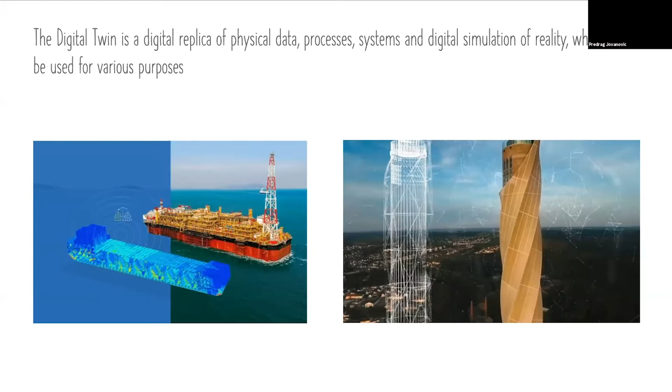You will see in the next slides how we can play with the tools that digital twins technology allows us. For the beginning, I'll try to explain simply the purpose of a digital twin. If we imagine we want to test the strength of an egg, for example, a single egg, we want to test it but we don't want to break it. This is the likely option, and the option without any damage is to test it in the digital world, because after we run the test, we can set up a new egg and test it again, while in a natural environment or in reality, we would break the egg, so it's damage that cannot be recovered.

How the whole idea started: in the 70s, NASA was testing some twins, not digital twins, but twins, where they tried to do simulations on small-scale objects. The technology of creating a digital twin model in the format we now know it, an existing or designed object with an identical copy in digital format, was created in 2002 and was first used again in astronomy by NASA, for the production of various components and systems for different suppliers. So we can say digital twins have been used primarily to calculate the life cycle at the beginning of the journey, for component systems and various assemblies and structures after installation, production, and construction. Primarily, digital twins were used to estimate the cost of maintaining different components, systems, and buildings by making various simulations of phenomena and processes that would occur on existing objects using their digital format replicas.

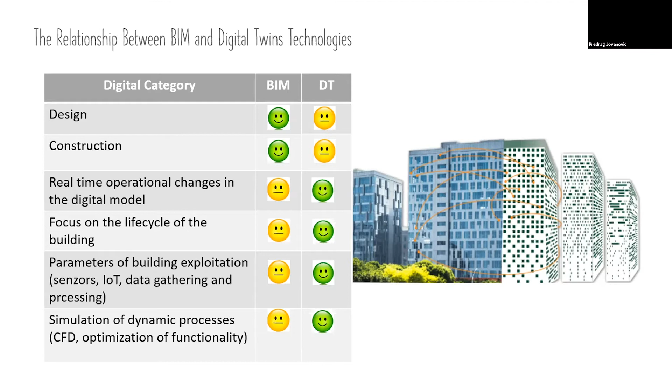I would say also some other like energy efficiency and so on. I think digital twins technology took the supremacy over BIM because, again, BIM is mostly a design tool, while DT can also deal with dynamic processes which are happening in a building.

So the relationship between BIM and digital twins technologies can be defined that the BIM model can be considered as a starting point of digital twin development, or without a BIM model, we cannot do digital twin development - simple like that.

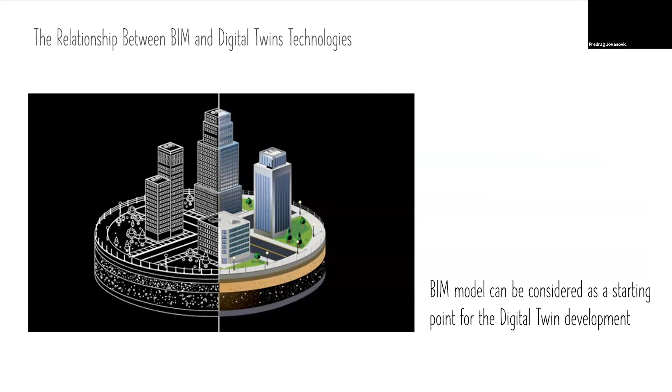Why do we need digital twins? So in the BIM world, most of you know, I probably don't need to explain what does it mean 3D, 4D, 5D, 6D, and 7D.

But when we come to maintenance, then we have a problem with the dynamics again, and with dynamic impact of an environment. So when we speak about digital twins during the design and construction, a good example is the car crash test, which is a fantastic tool to test the car and not to break the car. So it makes car model development much cheaper.

We also did some tests in Arup where we were testing - for example, blue guys are curious, red guys are in a rush, and orange guys like to see, for example, what's happening in the fashion stores. So depending on different preferences of humans in a group, we could simulate how the behavior of a group happens in a corridor, such as elevators, stairs, or corridors like the area where pedestrians mainly move.

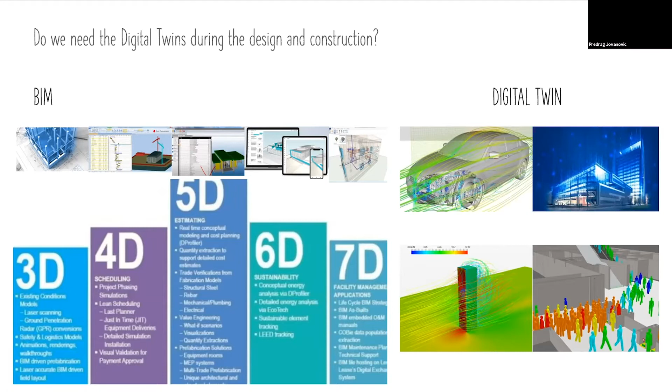In this case, I think we did a test for an underground station in London. And I think this is where we should definitely use digital twins during the design and construction. So I think dynamic impacts also can be considered in different design phases.

Now, when we speak about buildings which are already constructed, we speak mostly again about BIM takes us to maintenance, and then we have requirements to measure something, to optimize the documentation, to be able to click on a certain element in a digital twin and to find out all the properties of that element, which partially BIM also allows us to do.

But what we cannot do in BIM is to check, when the building is constructed, does the building behave in the same way as we designed it during our design stages. So then we come to the issue that we want to measure how our design was done.

Then for the client's needs, we can do an audit or permanent audit by using a digital twin. We can increase the energy efficiency. But if we say we can do it permanently by measuring some values using different sensors and then transferring the data through IoT into the cloud and analyzing that data, we can say that we can permanently optimize - semi-automatically, automatically, or by human decision.

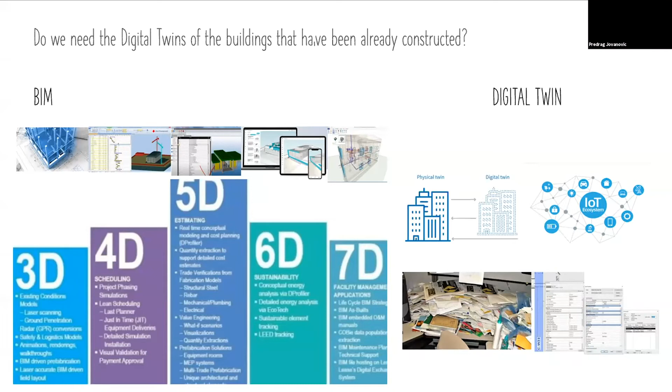But the most important thing is that we are dealing with real data collected from a real building and a real environment, or like a natural environment. So digital twins, digital tools of simulation in digital twins technology.

Typically, we use CFD as a tool to test the models in the design phases, and I think this is the best way to try our design in a digital environment.

Then, once the building is constructed, then we speak about sensors, which are collecting real-time data. Then we speak about IoT.

Python is the most preferred in my case - sorry if I made a mistake in anyone's opinion, but yeah, Python is the most preferred data science tool for that data analysis, and also it's the step into machine learning and artificial intelligence, which are the most sophisticated areas where we create semi-automatic or automatic systems which can make decisions based on data gathered or collected by sensors.

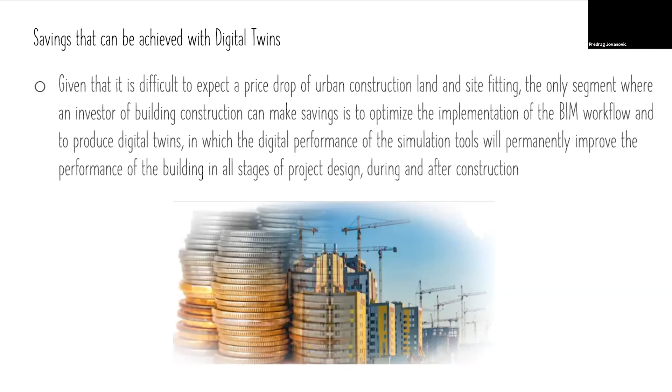By applying BIM workflow, or digital twin workflow, with proper BIM management and a complete BIM project process, somewhere between 5 and 15% more problems have been processed in early design stages, which leads to better design at the end. I took this data from Lend-Lease, because we have great collaboration with them - there was a questionnaire, and we discussed projects from 10 years ago versus projects now when we apply BIM and digital twins in full capacity. As they said, around 10% more problems are spotted in early design stages.

So imagine that you can save, for example, space reserved for risers and have that as commercial area instead of technical area. This is something really worth considering.

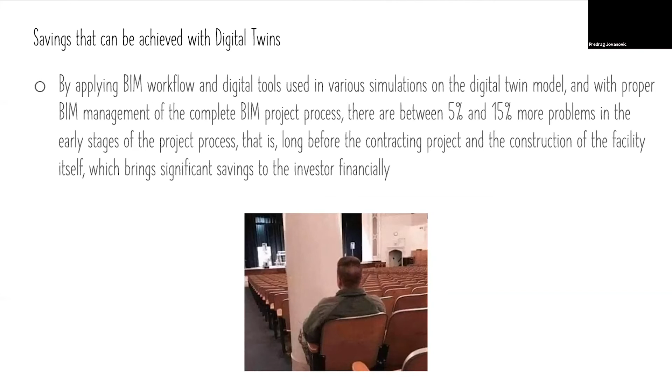The use of different sensors in a building which generate data through data platforms helps to automate equipment, as I mentioned earlier. Very simply, when we are testing permanently, or on an hourly basis, measuring the temperature in certain rooms, spaces, corridors, or wherever we define, we can optimize the energy efficiency of that area or of the overall building.

After a building is constructed, I also have data showing that without any big research, just by a simple audit, energy efficiency can be improved by at least 5% for each building constructed between say the 70s and 2000, because during that time's design and construction, people didn't consider energy efficiency, insulation materials, jalousies, and optimization of equipment in the building as much.

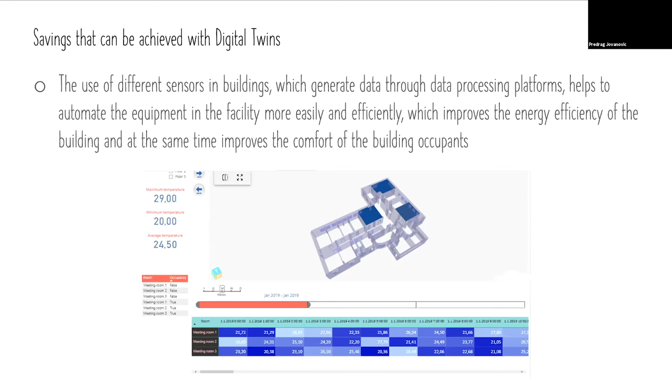There are also big financial savings, because by analyzing the data collected through sensors in already fabricated and constructed objects during the design process, the investor makes significant savings in the speed of fabrication or construction of the building.

What we are also doing at Arup is collecting experience and user experience from our clients, and at the end we compile, for example, the design for typical usage or type of building, and then we have predefined solutions for a certain type of building, like a factory or retail. We have some specifications - we call this collective mind, where we collect how successful we were in our previous projects. By implementing the conclusions from previous projects, we can make significant savings for our clients.

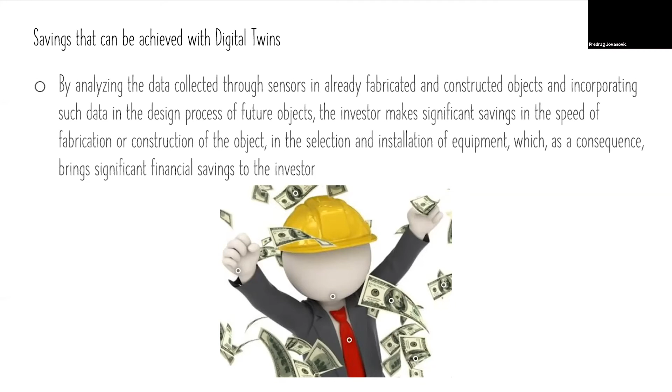Finally, and most important in my opinion, we come to the savings that can be achieved with digital twins technology - by analyzing the data collected through sensors, we can save the world, which is the idea of today's event. If we are in line with the SDGs, the Sustainable Development Goals developed by the UN, we are making our planet a better place for life.

Digital twins technology, as you could see in the previous slides, can help with energy efficiency, which, if you just say energy efficiency, that's enough, but there are many different aspects, such as avoiding constructing something and then testing it, when we can do it in digital space without leaving that environment.

I think we are coming near to the end of my presentation. So now, the digital twins examples.

So in Arup, we have developed the Arup Carbon Digital Tool. This is a very simple application, which works together with the Speckle data transforming platform. The aim of the Arup Carbon Digital Tool is to link digital design models to whole life carbon calculations, so we can rapidly quantify and reduce the carbon dioxide equivalent emissions and associate them with our design. So during our design, we are monitoring the CO2 emissions all the time.

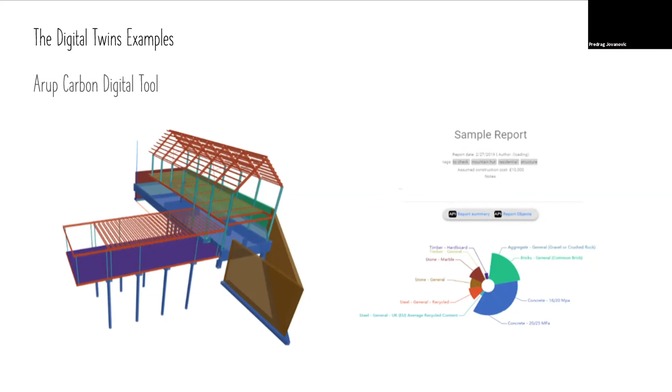In doing this, we are acting to achieve United Nations Sustainable Development Goals, specifically 9, 12, 13, and 15. This tool enables the user to interactively view carbon hotspots in their design in a BIM or digital twin environment. The visual interactive carbon analysis summary can be shared very simply with colleagues. So during the design process, we can see the total carbon dioxide produced in our design, and then we can optimize, discuss with the client, and optimize our design again to save the world.

A very simple example of monitoring, which I think I explained in some previous slides, is where we are also monitoring our offices, and we are trying to learn lessons and optimize the space where we are working, optimizing energy efficiency at the same time.

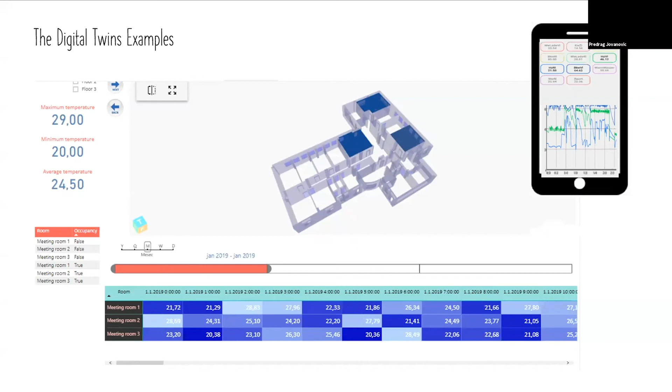Finally, I have an example which is not from Arup, but from a company I'm writing articles for, and they have developed a fantastic digital tool. The name of that application is BIM Real Estate, and with that application, which is totally customizable, you can manage rent. In this case, this is a rental of existing flats.

The most important thing is that maybe I'll have a few minutes. Maybe I don't. Few minutes. So maybe I shouldn't speak too much about this. Maybe I can share with you. But also, Predrag, you're right that your scheduled time ends at 5:30. So if people are going to hop to other sessions, that's fine. But we actually have a break after your session, so if you want to run a little bit over, that's totally fine, and anybody who wants to stay can stay. Okay, thank you very much.

Okay, so this app comes from Revit, and then it's built on the Forge platform. All the data is sitting in a flat area, I would say. On the bottom left, there is a possibility to select the floor and then to select the flat, and there is also a possibility to walk through. But the real benefit of this tool is that there is a customizable database behind everything. The database is filled, and for example, energy consumption and issues in maintenance are also recorded in that database.

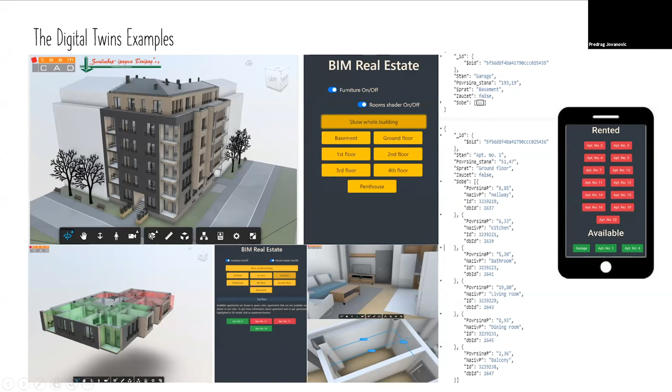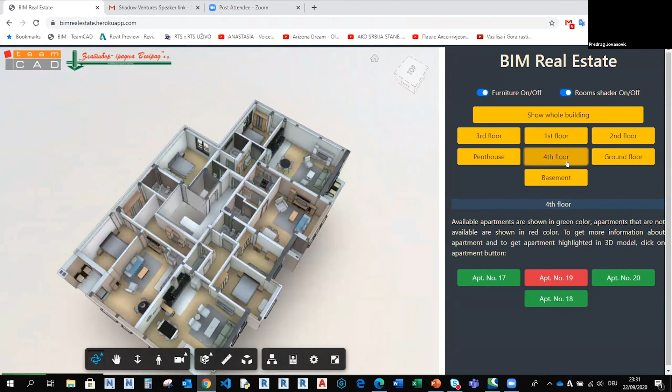Indeed, we can call this a web digital twin. If I just go to this app, it's sitting in a browser, in Chrome. We can switch furniture on and off. We can switch on shaders. We can go to the 4th floor and go to apartment number 17, and we have the data. This is only for public purposes, so we have areas and so on. Inside the database, we also have all the data related to that flat, like energy consumption, which is the most important thing for real estate. I think this is a very cool thing, because it's also accessible from a smartphone.

So I think this is also a fantastic example of how we can optimize the real estate industry by using this sort of digital twin, in this case web-based, because it's unlikely that everyone will accept Revit and robust Autodesk solutions or any other solutions, while with a web-based model in Chrome, everyone, even my daughter, who is 12 years old, can play around. She was playing around with this model, and she was able to read the area. It's very simple to use.